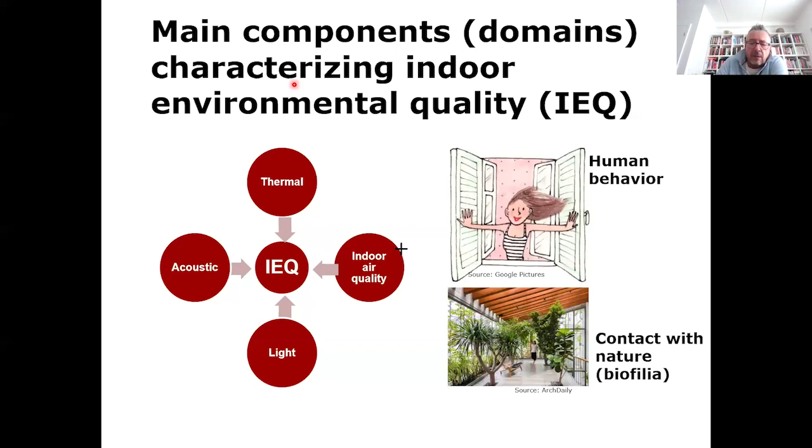And then if we look at the effects of indoor environmental quality, and if we think about a healthy building, a building that is basically thriving, it is providing the conditions for occupants in which they feel well, and then there is no risk for health. Basically, we know how to establish such environments.

There is enough evidence in the scientific literature about how different components of indoor environmental quality affect humans. Just a few examples here: let's look at the thermal environment, for example, where we know it affects comfort, cognitive performance, and sleep. Cognitive performance meaning work performance and learning. That has been documented by different independent groups, not only by our group. So this is a sort of summary of what we know.

If we look at indoor air quality, for example, we know again that it affects health conditions, work performance and learning, and sleep. And there is enough information for creating a visual and acoustic environment.

Why am I mentioning air quality and thermal environment here? Well, first of all, if we think about all those components, there are three that we can perceive, see, or hear. We know that it's warm, we know that it's bright or dark, or we know that it's noisy or quiet, but we really don't know whether the air is good or bad. How do we know, wherever you are, that there are no toxic pollutants? How do you know there are no infectious pathogens in the air? This is invisible, probably the most invisible parameter among all those components of indoor environmental quality. So although we see, although we feel, although we hear, it would be nice to somehow rate what combination of those parameters actually provides the best conditions for people living in buildings.

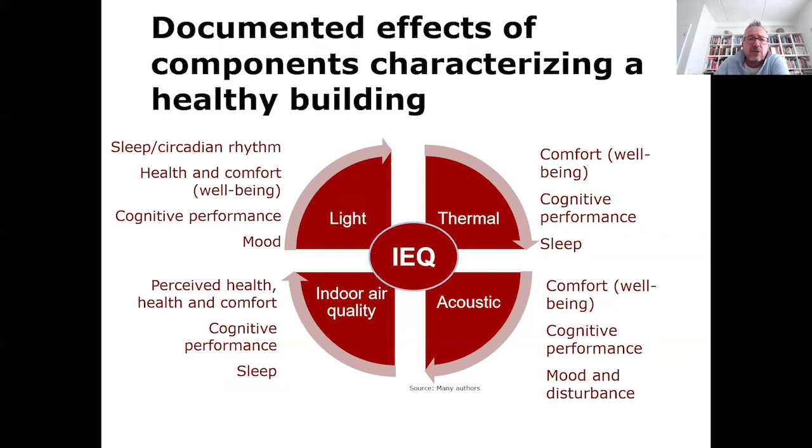There have been many various indicators considered for characterizing those components. We've been looking through those parameters trying to identify whether there would be standard parameters, or some used more often or more frequently. There are, but in the end we found that if you look at the literature, if you look at the standard certification schemes, there is no real consistency or coherent use of the parameters. Some parameters are always used, but most could be different.

In the end, we figured out there could be up to 90 different indicators or parameters that are normally measured or quantified in order to characterize indoor environmental quality. And again, there is no set of parameters formed into a certain rating scheme. That is really quite surprising, that we have not been able to develop that rating scheme.

Methods of rating are very popular and frequent in other disciplines - for food, for energy, and even outdoor air quality. There are indices or parameters or labeling schemes that let you know whether your house is using a lot of energy, whether outdoor air quality is polluted or not, or what is included in the food you buy and whether it's healthy or not.

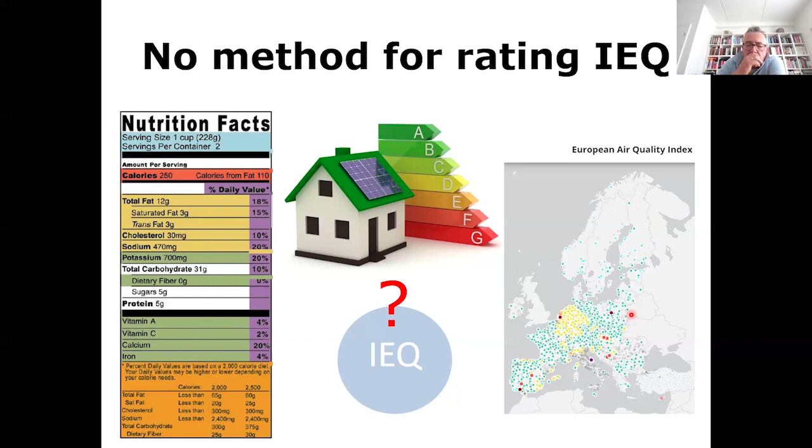And this is important - why? Because it provides an incentive for improvement of indoor environmental quality. If we don't know how the environment is, how can we improve it? It will create a benchmark, monitor performance of buildings, provide input to control, to energy simulations, and also to economic calculations. How do I know whether there would be negative or even positive consequences for health, absence rate, or even work or learning, if I don't know what the quality of the environment is? And then it will demonstrate the invisible.

So again, coming back to air quality - if we don't know whether air quality is good or bad, a rating scheme will tell us that the air quality, or maybe the environment in buildings, creates no risk. And finally, it will raise awareness.

The pandemic, which we want to forget very quickly, actually raised awareness among many people that there is something invisible that we have to hide against, wearing masks and staying home. So a rating scheme would also provide that kind of awareness, increasing interest in the exposures that are occurring in buildings.

There have been some recent attempts to develop indoor environmental quality schemes, and I'll provide two examples that are probably European in inclination. There are many building certification schemes that I don't want to go through, because they've been decided based on economic interests for the councils developing them, and the rating of environmental quality changes depending on the specific focus. But here, I want to give you two examples that are probably independent.

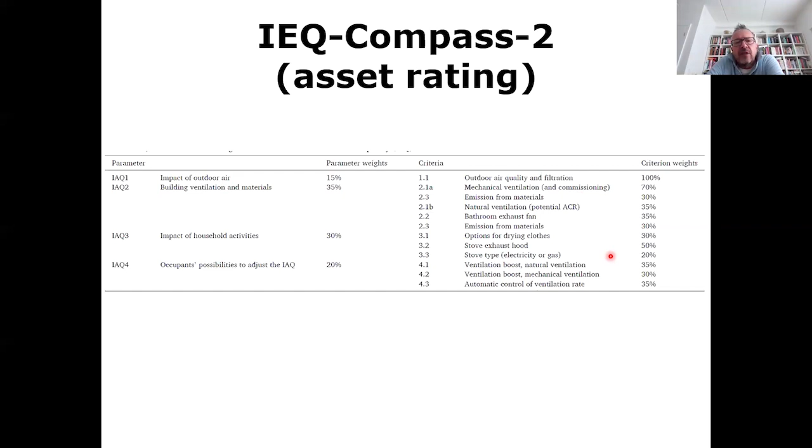Those weights are based on decisions that have been taken, or surveys among experts, and also the decision of the group that developed it. Then there are certain criterion weights. So basically this is a similar approach to what is used in certification schemes, looking at a particular aspect of the environment and trying to assess what the building can deliver.

The other one that was developed is called Levels. It was developed before the pandemic, and during the pandemic the European Commission reduced the focus on it, but now it's coming back, and Levels will be coming back.

It's a framework of core sustainability indicators for office and residential buildings. It contains three parts, introducing indicators, and part one shows how to make performance measurements. There are several indicators called macro objectives related to greenhouse gas, circular economy, and efficient use of water resources, a similar approach to any certification scheme.

It also includes the element of healthy and comfortable spaces. In those healthy and comfortable spaces, there is indoor air quality and thermal environment only, while acoustic and visual environment is only to be considered in the future. So basically, what is estimated is good indoor air quality based on the selection of building materials, the levels of ventilation or carbon dioxide as a marker of ventilation, and the time above a certain temperature to avoid overheating in a building.

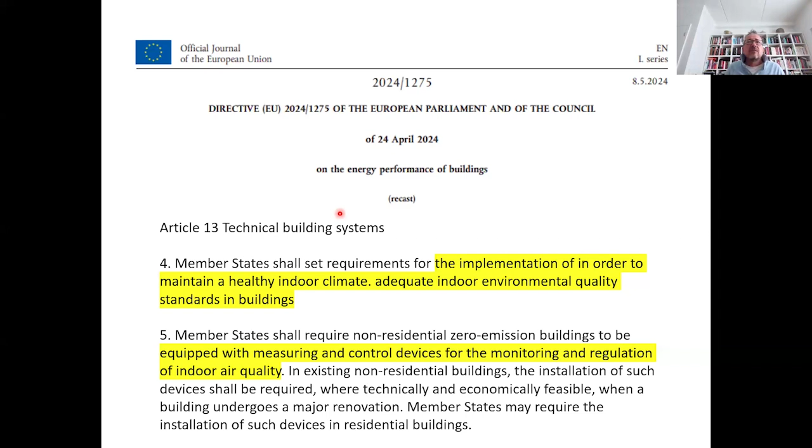And the reason for that is that it's not part of the treaty. So each member state has to develop their own methodology. So with that, can we propose something?

We have been working on a European project trying to identify arguments or incentives for improving the rate of energy retrofits of buildings in Europe. Basically, the conversion of buildings into low energy or low emission buildings is going very slow. So the European Commission is looking for strong incentives to do it, and one of the incentives is to look for so-called non-energy benefits. Those non-energy benefits occur because of changes in the energy performance of a building, and if they are quantified, they can provide an additional argument.

And one of the methods of quantifying those non-energy benefits is to characterize indoor environmental quality in a building. Because if we know the indoor environmental quality of a building before retrofit and after retrofit, and if we can demonstrate that it gets improved, then it can be converted into economic benefits. I will not show how that can be done today, but I will tell you how you can possibly measure indoor environmental quality.

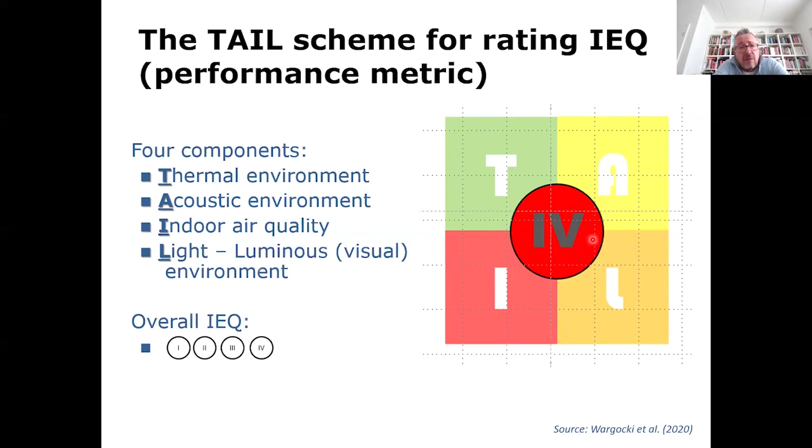And therefore, we decided that the rating is actually the worst among the 4 components. And then to characterize those components, we selected 12 parameters.

We wanted to select fewer, and I'll tell you why it ended up being 12. We wanted as few as possible, knowing that since it's the first attempt to develop a metric, for it to be adopted in practice it can't be too complicated, but it also has to provide strong and trustworthy measurements. So we decided to select the parameters that best represent indoor environmental quality, that actually have reference values in the standards or guidelines, and that can be measured fairly simply in practice.

If we were to select 25 parameters, or parameters for which we'd have to develop our own reference or benchmark levels, or that would be difficult or expensive to measure, I don't think the rating scheme would be adopted.

It doesn't mean the rating scheme can't be developed further, but in order to get it implemented, we need to compromise, or make sure that, without compromising the quality, we need to have it fairly simple and crude in order for it to be adopted.

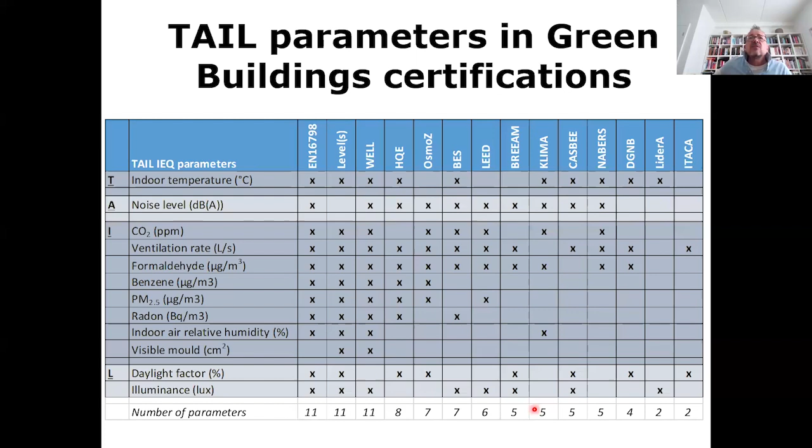So if you compare it with the standard EN 16798 or the levels, or even the WELL standard, basically all 11 parameters are included in those documents. And then if you look at other certification schemes in Europe that are in use, there are many of those parameters that are included. So the principle or idea of using TAIL is basically to have the parameters that are already in place and used. This is documentation of that.

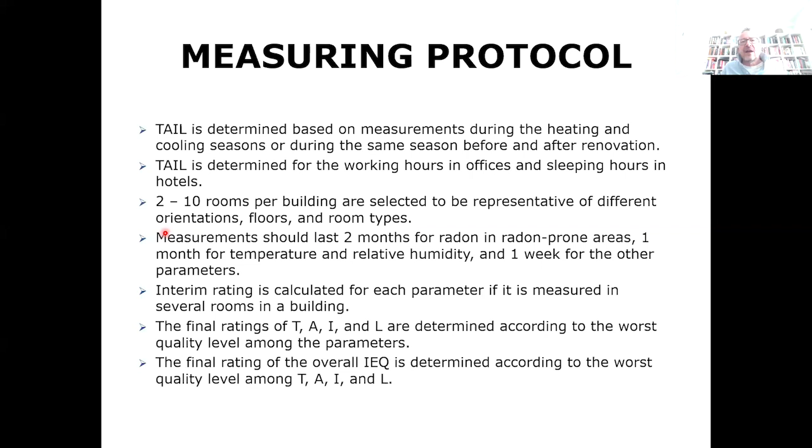We also developed the protocol because we understood that there has to be a protocol - how to make the measurements, when the measurements should be made, in which locations the measurements should be made, what instrumentation should be used, and so on, and how to determine the final category of indoor environmental quality based on the measurements done in different locations. All of that is described in the paper, and we understand that it's a protocol that can be used. That was our idea - we didn't want to develop some theoretical approach, but something pragmatic that can be adopted immediately.

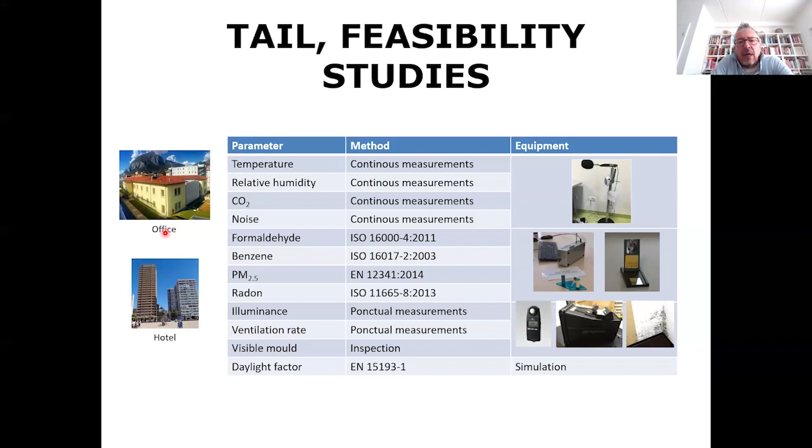And then we did a feasibility study. When the metric was developed, we only made it on two types of buildings, an office and a hotel building. And then we performed the measurements there, and we found out that the metric can actually distinguish between the different parameters, and then can distinguish between the different buildings.

Just to let you know, we have now completed the measurements in 6 office buildings at our university campus, altogether about 60 different spaces, rooms, where we took the measurements. And now we are also looking at different aspects, basically trying to understand how the TAIL rating scheme is performing, and we'll be publishing this soon. So we provide more and more evidence on the usefulness of that rating scheme, and more results will be coming.

Here I'll just tell you that we learned that this rating scheme was very useful. But once we published that, many people were just asking us, well, of course you look at a building that is completed and in use - but what about if I'm sitting at the drawing board and I want to make a renovation of a building, or I want to make a new building? How can I predict what would be my TAIL in a building? So coming back to the idea of what the building can deliver, we developed a tool called PredicTAIL, which allows designers, architects and engineers to assess the decisions they make during construction or design of a new building or the retrofit of a building.

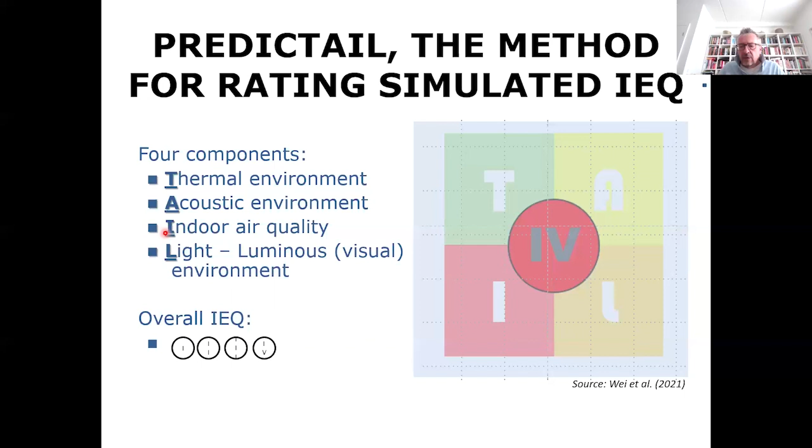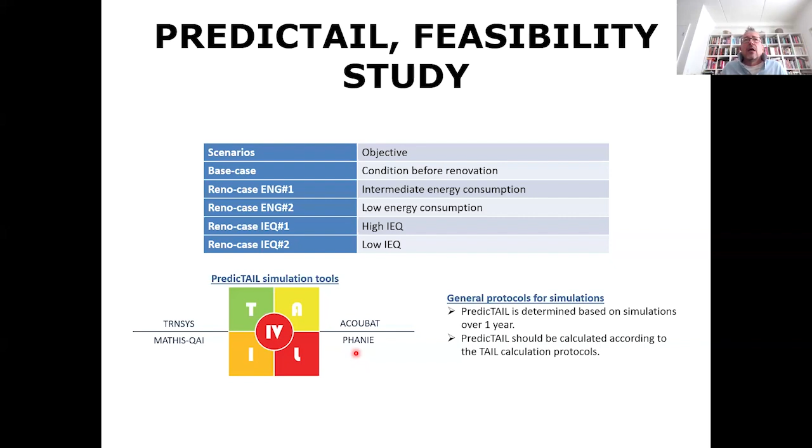We actually ran the feasibility study, simulating the different components of TAIL using different simulation tools which are mentioned here, but any other tool can be used. We had a base scenario, which is the condition of the building before renovation, and then we had two energy retrofits - intermediate energy consumption and low energy consumption - and we also made the retrofit with respect to indoor environmental quality. We actually showed that the rating scheme is able to discriminate between those different scenarios.

So it can discriminate the best scenario from intermediate scenario and the base case scenario. The best scenario would be going for the low energy house, low CO2 emission building, or the best quality of environment. So basically we documented that this rating scheme can be used.

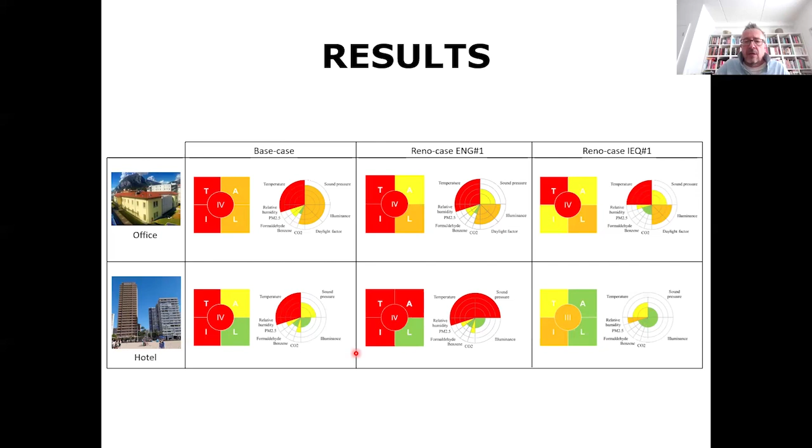The rating scheme was developed mainly having offices and hotels in mind, because that was the original project. And we asked ourselves, can we do a similar rating scheme for schools, or would the tool in the format that was developed apply also for schools?

We realized there are two parameters that may be overlooked in the original tool. If we think about schools, one would be reverberation time, because there is oral communication between the teacher and the students. And then there's one pollutant that is actually coming from outside. Many schools are naturally ventilated, where students and teachers open the windows. So it's nitrogen dioxide.

Our focus on nitrogen dioxide was because the World Health Organization air quality guidelines looked very carefully at that parameter in the new update of the guidelines. This is why we thought the nitrogen dioxide should be strongly considered, particularly because it is important for children.

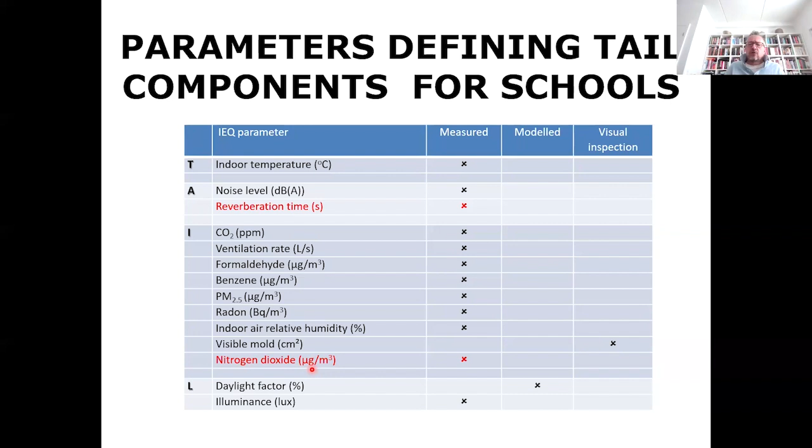We applied this new tool for schools on the data that was collected in France, incomplete unfortunately for all tool parameters, but some of those. So basically it was 308 schools and 600 classrooms.

Here are the results, and also the illustration of how important and powerful the tool is. Because basically what you see here is four levels of indoor environmental quality with respect to all the components of indoor environmental quality in those schools.

This is the quality of thermal environment - there is some discrimination between the schools. This is acoustic environment - again some discrimination. This is air quality, which you see most of them are red. But basically what you see here is you can actually say which schools require which of the conditions to be improved. That is a powerful message sent by the tool, because it's providing you with this information.

So what is the tail of tail, as I call it? It is a framework for rating components and overall indoor environmental quality. It allows comparisons across the entire building stock, because the same measuring tool is used, and it is a performance metric, and there are no arbitrary credits. We are not giving any credits. We refer to the existing standards and guidelines.

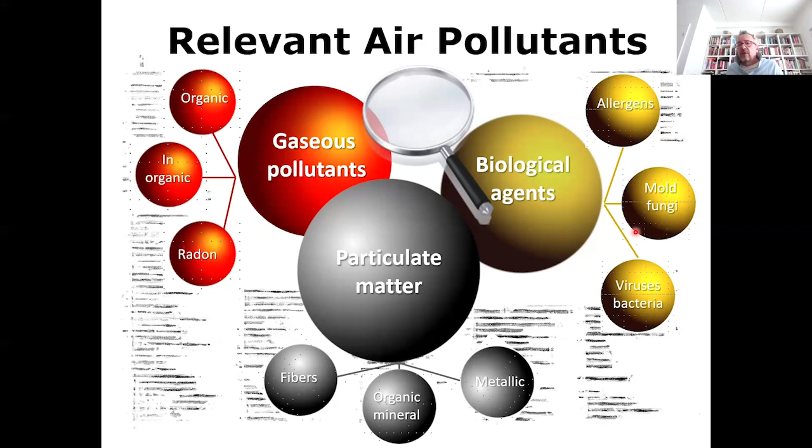Of course, the biggest challenge is air quality. I know I'm running out of time, but I just want to mention this important parameter. Air quality is the biggest challenge of all four components of indoor environmental quality because it's invisible. Air quality contains gaseous pollutants, particulate matter, and biological agents. There are many different metrics and indices that have been applied to characterize air quality.

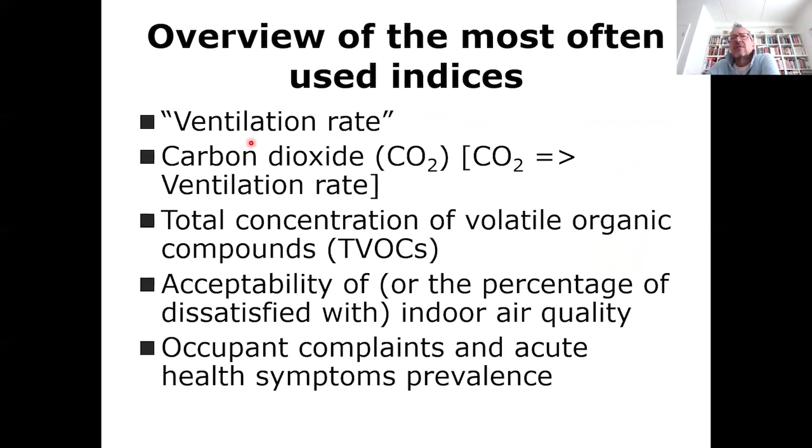The most used tool today is ventilation rate - high ventilation rate meaning better quality, or carbon dioxide. Actually, carbon dioxide is becoming the most popular one. But if we look at the WHO air quality guidelines, there are several other parameters that have to be considered: PM2.5, PM10, ozone, NO2, SO2, and CO. Look at those parameters - they are not mentioned in the most used indices of indoor air quality.

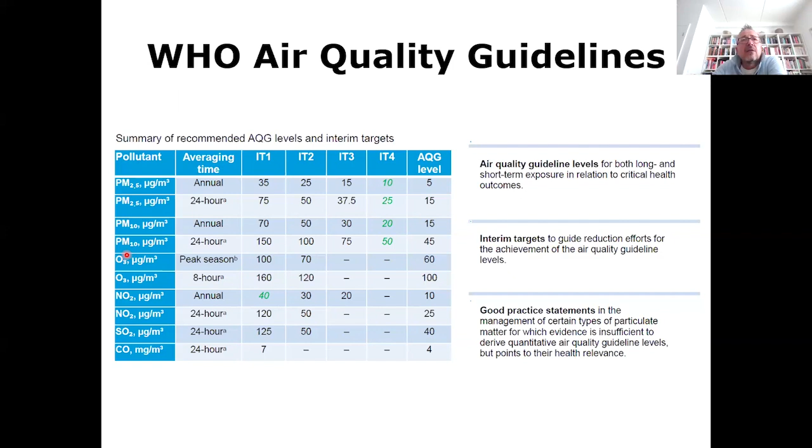Many of those will have their origin outside in the ambient air, but the buildings are not tight - there are many, many buildings which are untight. Whenever we open a door or window, those contaminants will probably penetrate indoors. And for air quality, we will never really know all the chemicals that are in the air. I think among the thousands of chemicals in trade today, only 1% is characterized for toxicity, and there is more and more coming.

So it's very difficult, basically, to characterize all of them. There could be different ways of characterizing, and some have been proposed based on the harm that is caused. It's called the DALY concept, disability adjusted life years. It's basically to look at what harm is created by different pollutants.

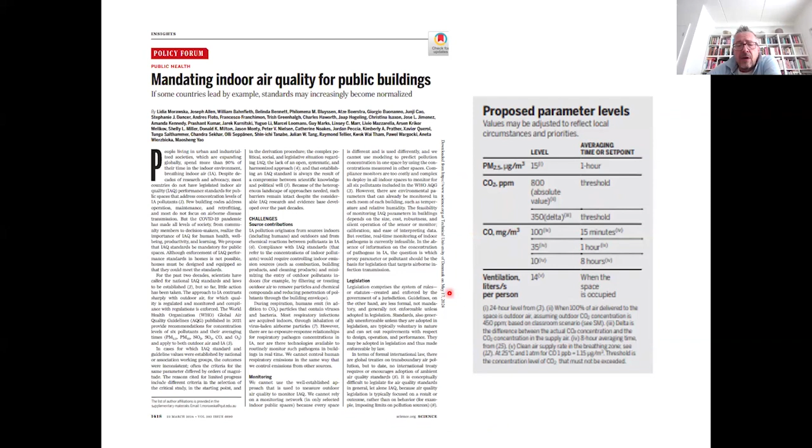Looking at that approach, these are the pollutants that have been considered. There is recently a paper published in the Policy Forum in Science that proposed PM2.5, CO2, and CO, as well as ventilation rate, as the parameters to characterize indoor air quality. Indoor air quality also needs to include the parameter related to infection risk, because infection risk and most respiratory infection is actually airborne.

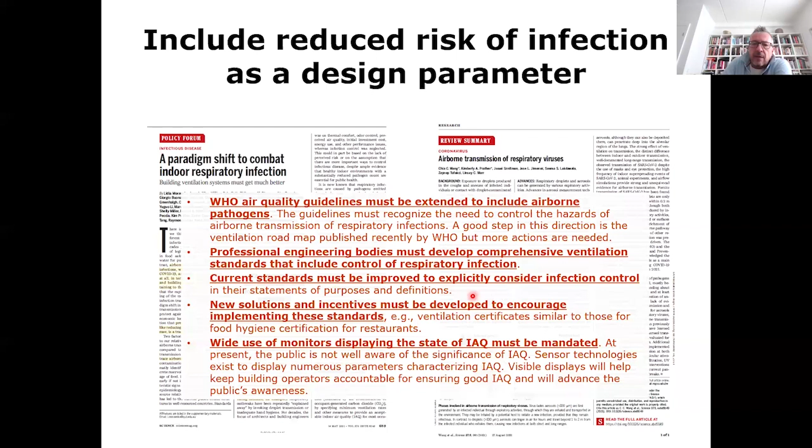So basically, when we talk about air quality, we need to also think about how to protect against airborne pathogens and infection. These are the parameters that are included in TAIL, including nitrogen dioxide for schools, and basically they cover all the parameters that I have mentioned earlier. So what we have in TAIL is probably the most up-to-date list of the pollutants that would characterize indoor air quality.

And this is, again, indoor air quality - we cannot sense there is something toxic, we cannot sense there are pathogens in the air, and so on. We don't have one metric that can characterize it, like for the thermal environment or acoustics. So there has to be a long list of parameters, and this is the only reason why there is a long list of parameters.

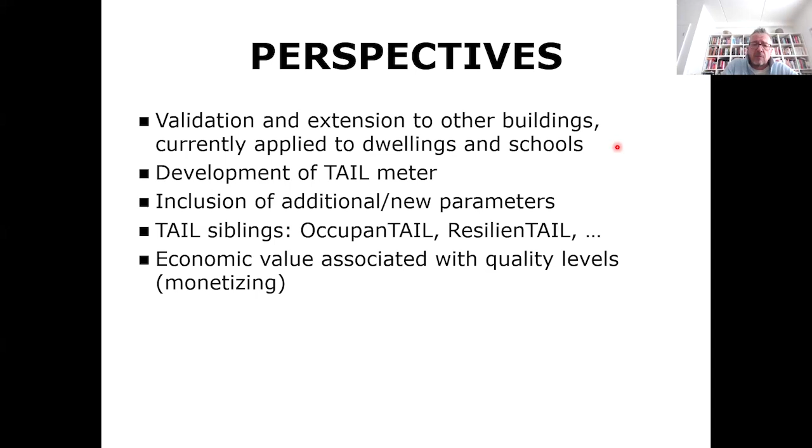So looking at the sensations of the occupants and comparing them with the measurements, and also thinking about the resilience of the buildings and so on. What is most important for us is to look at the economic value associated with quality levels of TAIL. We would like to characterize TAIL based on harm quantification - each component of TAIL can create harm to us.

That could be temperature - maybe the harm is that we perform less well or sleep poorly. Sound, again, maybe we sleep poorly, or other parameters and so on - and basically putting the economic consequence or benefit associated with achieving a certain level of TAIL will provide additional incentive to further develop environmental quality and improve the conditions in which we spend most of our life.

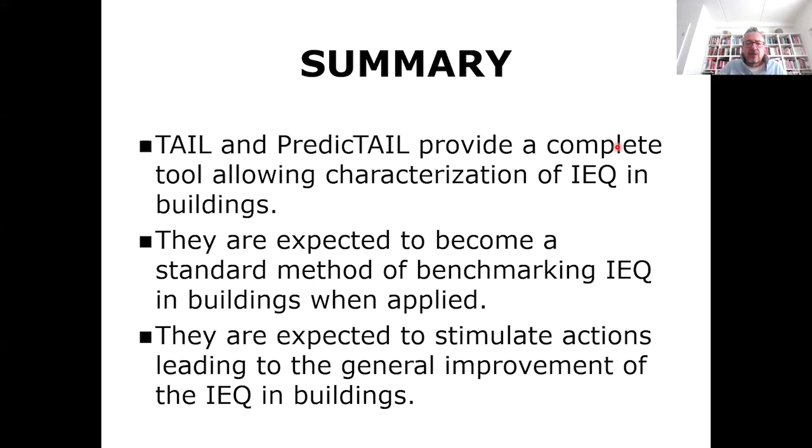So in summary, TAIL and PredicTAIL provide a complete tool allowing characterization of IEQ in buildings. They are expected to become a standard method of benchmarking IEQ in buildings when applied. I have been discussing it with the European Commission, but whether it will happen in that format or a different format, or whether that would only be an inspiration to develop another way, we really don't know. But there is a strong push towards developing those rating schemes, and we believe they will stimulate actions leading to general improvement of indoor environmental quality.

In my presentation, which I believe will be shared afterwards or in the recorded version, you'll see references to the papers we published on this particular topic, some of which I referred to in my presentation. So I'll stop here. Thank you very much for your attention, and now I'm open to any comments and questions you may have. Thank you.